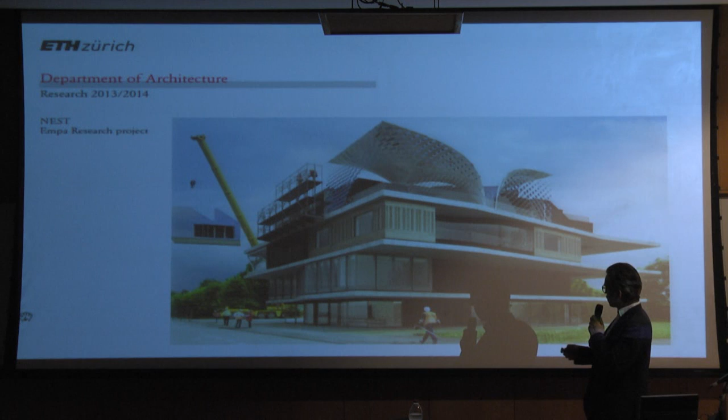This is the NEST building of the Empa Research Group, designed also by Gramazio and Kohler, equipped with different modules tested on site. So you see, we are not only about teaching and researching, but we like to translate and test it also in reality. And maybe to come closer to what we're doing tonight, it's also about exhibitions of student work and its development that we like to show.

We like to publish this work also. The ETH has a big output in publications.

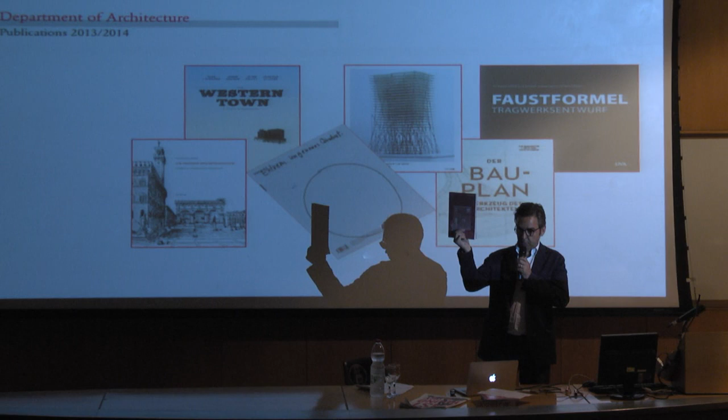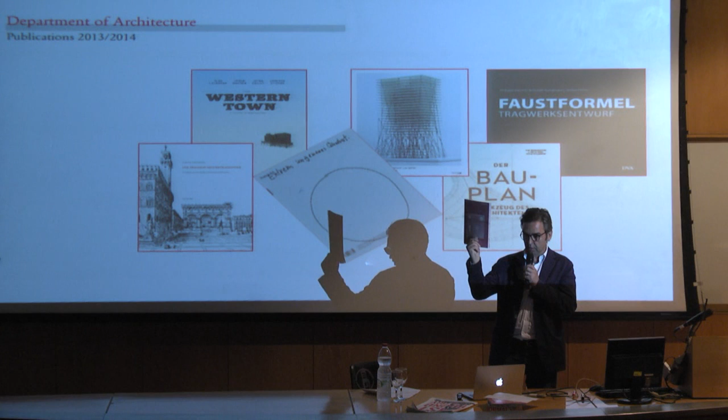Something interesting we want to share with you: periodically at our department, at our chair, we produce something called the Slum Lab magazine. My colleague Alfredo was here two years ago, almost to the day, and presented this magazine. I'm bringing you a new version for your library, and the outcome of this workshop is the plan. We have secured the necessary funding for it. The outcome of the workshop, with probably a continuation of two to three months longer, will result in a new issue of the magazine. So I think problem-oriented work and project work is always the best medicine to keep people together and keep going.

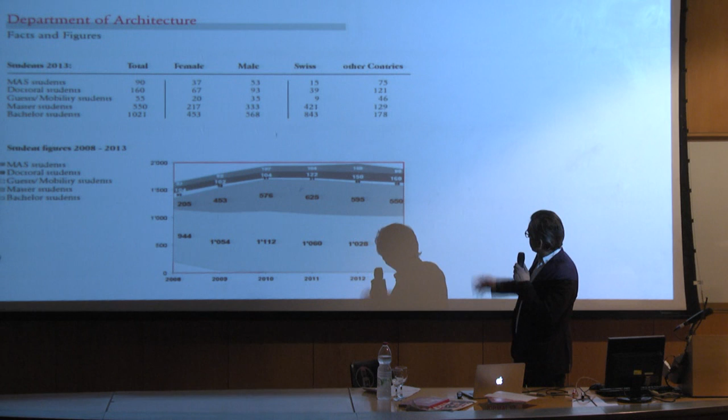Once again, I mentioned we are roughly 2,000 students. Here you have the numbers. We're flattening out on it, but I'll leave you with that and step into the lecture. I didn't want to miss the opportunity to introduce our department on a general level, to give you a good idea of whom you're dealing with.

We already heard this is a project of cooperation, and we think a lot of development opportunities are actually in active collaboration and cooperation. And cooperation is always also a change of perspectives, right?

You all know this picture, obviously. You see it almost every other month. But actually, secretly, this photograph celebrated its 40th birthday just a couple of months back, brought back by Apollo 17, which is the most famous photograph in history, I was told. It's the view of the Earth, the blue marble that came out of it. I'm showing you that because it's also about the creation of consciousness. Researching and teaching is also about building up a kind of consciousness in society and creating a theme, a topic for our society for the future.

And as we look closer, this blue marble over time has actually turned into something else. It's not the blue marble anymore, it's actually a network of cities. This is our societal challenge that in the last couple of decades concentrated much on the environment, on our natural resources. We are entering really a new era, one could say - it's an age of cities, an urban age.

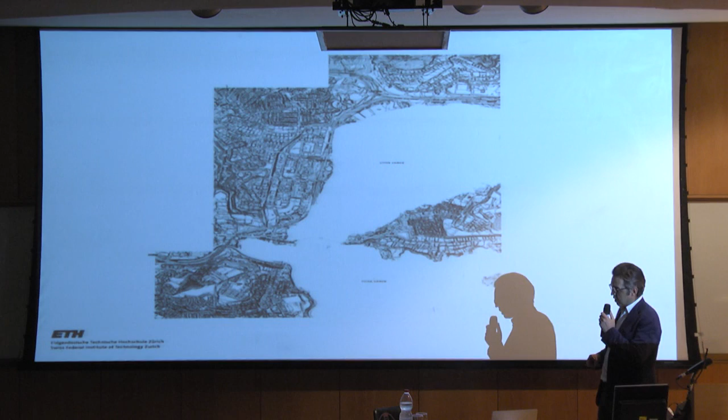I'll give you another example. If you look at a map of Caracas, Venezuela, this is in the east of Caracas. Only a few years back, this is not readable in this pixelation, but it actually says Zona Verde. Those areas were introduced in the mapping at City Hall as Zona Verde. Today we all know those areas look like that: a majority of the population lives in highly dense, choreographed, self-organized neighborhoods.

We have started, and this is my pretext before I lead you into two projects, one in Caracas in a tower and the other in South Africa in a township, to look at them with more detail. What we call this is not a mountain full of houses, but this is actually a house the size of a mountain, and this house has many, many floors.

You could dissect and figure out what is actually connected and what is separate from each other. But I think this whole idea that cities are not an assemblage of different houses -- if you look at the infrastructure, at the land, at the very pretext and basis, as we talked about at a student review this afternoon -- if we actually change our perspective again, we will come to a lot of new and different starting points.

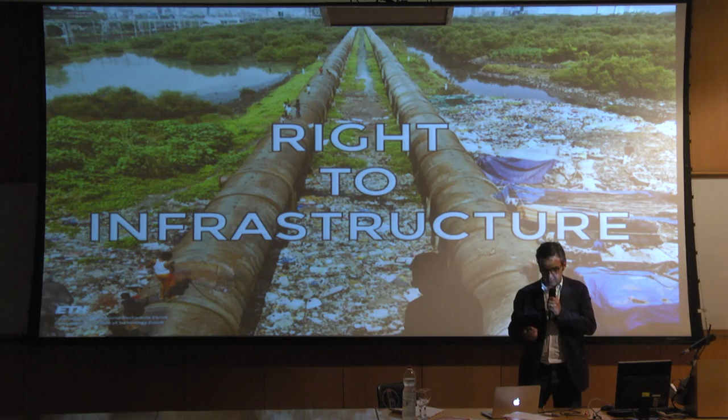By law, informal settlements in Mumbai are not allowed to be connected to the water system because the resource is too precious - probably something you'd have to deal with in an arid zone like Israel in the Middle East as well. I think those will be, and already are, the big challenges.

The right to housing - those rights are already laid down in texts, we all know them, the UN Habitat is disseminating them. The question is actually, how do we do this? That's still a big question mark.

It's very beautiful to claim that right, that people are allowed to live where they choose, that they're not sent by government to one place or another. Now actually the Chinese government is sending them into the cities whether they want it or not - before they were sent to the countryside. But the question is actually how to achieve that.

We think that democracy is certainly a very important tool in urban development. It's a very different ball game if you live in a dictatorship, a totalitarian regime, or a democracy. I think there are a lot of models that will only apply in a democratic society. It is also about transparency.

We were witnesses, with a group of ETH students going to Sao Paulo, when this favela was set on fire deliberately. At the time it was not known - somebody saw the gas cooker catch fire, but this fire was actually set by developers. They were brought to trial, and the fire only stopped because it started to rain. But we can't count on those accidental rescue angels anymore.

I think this is also why we called the exhibition over there 'From Denial to Anticipation.' We have to anticipate more of that.

That is also why I like to show you, as a last slide in this set, that the number one problem in cities is actually safety - not safety and security, I would say, just safety. It's not the water, it's not the electricity.

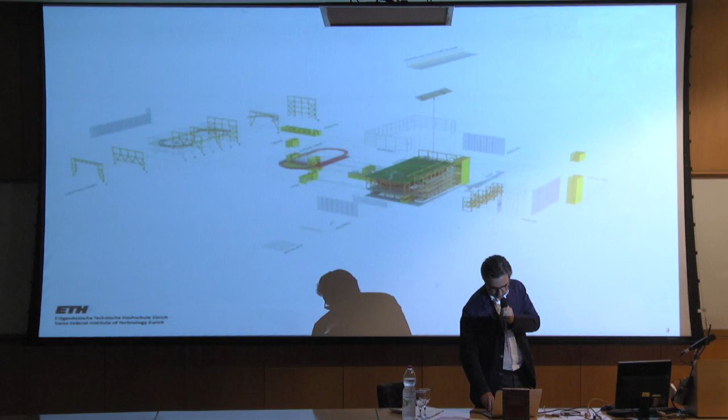This, for instance, is an industrial design type we call the vertical gym, and we're building them by the dozen. We identified 100 sites for them, offer them as a toolkit, and have built them to provide 15,000 people per month a space to practice sports, but also a covered internal space, something very much needed in slum areas.

We have also proposed that culture be seen and practiced in a more formalized framework, something that exists in all vernacular settlements but is often under-evaluated. We looked at a project today, in the afternoon, of a Berber village, again something where one has to find the essence of this culture and what that is.

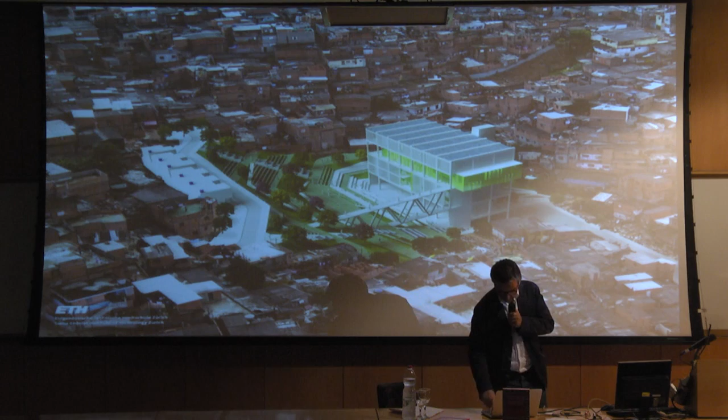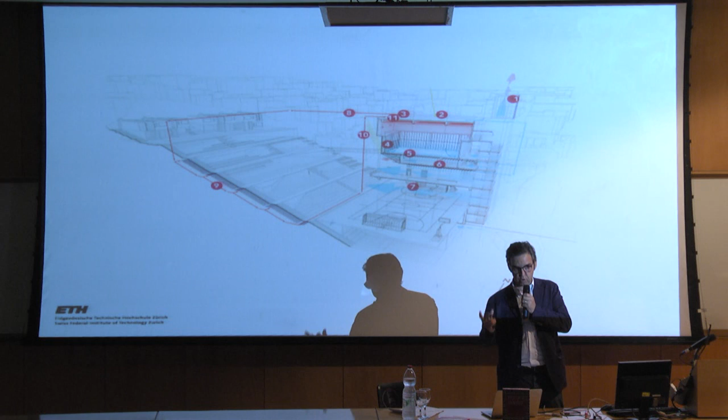In this case we suggest a music school on the site of a former landslide, using technology developed at ETH Zurich for capturing resources. In the same way as the Monte Rosa hut I showed you earlier, standing as a jewel in the glaciers, a building in a slum area is almost as dependent on taking care of its own resources—there's no water network, no electricity network, etc. to plug into in the slum area.

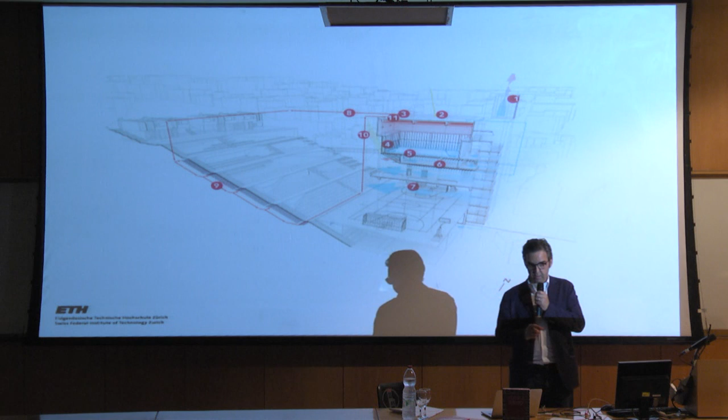I think this independence or semi-independence from centralized infrastructure is something that will be a lot more important in the future. And the last example before I step into the tower and Africa presentation is this metro cable system.

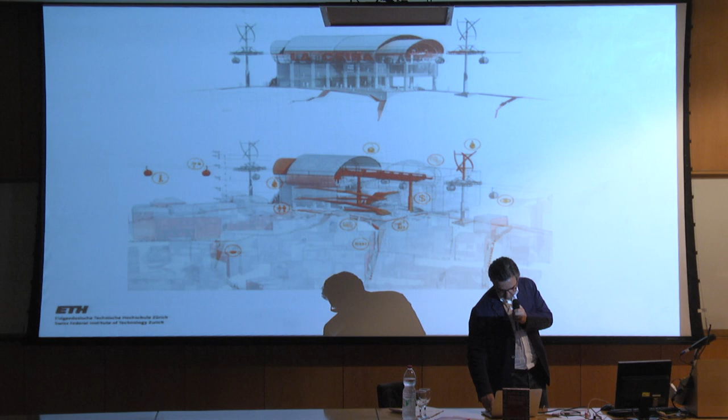Again, a technology that comes out of the Alps, out of Switzerland, that we have helped translate into other contexts—the industry practically opened a new field for them. What works in the Swiss Alps for the ski industry and for tourism, bringing this technology into another context and changing the perspective, has practically opened a new field of application for the industry, but it's also raising new questions and asks us to become more creative.

Because this question asked by the Harvard Design Magazine—can designers improve life in non-formal cities—is still a valid one. To what degree can we provide appropriate solutions, also against the resistance? I would say resistance often accompanies development; it's not that everything goes smoothly.

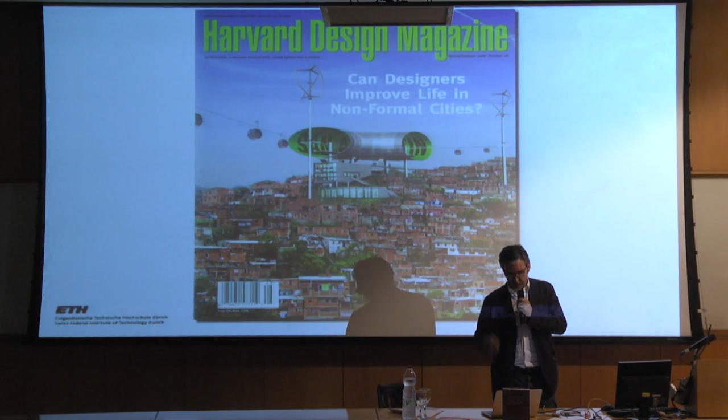This brings me now to the two examples that I promised you. One is this African adventure into South Africa, into a township of Cape Town, where we started identifying an area in the Khayelitsha township, behind the big Mesa rock in Cape Town, just off a few kilometers from the beach, where we began to cooperate and collaborate with a local NGO, Slum Dwellers International, run by Andy Bolnick.

They actually got a big grant from the Bill and Melinda Gates Foundation, also to develop in parallel a toilet module incorporated into this building I'm going to show you. It's a product, a co-product of EMPA in Switzerland, part of the ETH network—a sort of dry toilet, a closed circuit. And we're developing a sort of housing module.

What is this housing module about? I will not show you the whole movie, I'll jump over it, but I do want you to listen to the first sentences of this gentleman here.

I started to stay here, it was 1992. I was staying in a terrible shack. When it's raining—every winter season here in Cape Town there are heavy rains—we put some bricks on the floor because the water runs through, in and out, you see. And you have to put plastic on top of the roof because the roof is leaking.

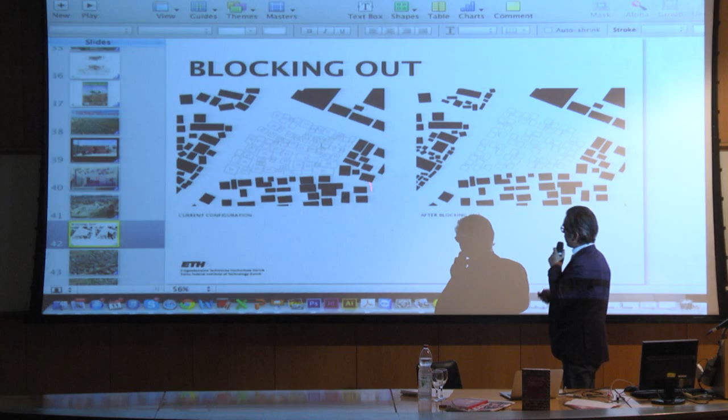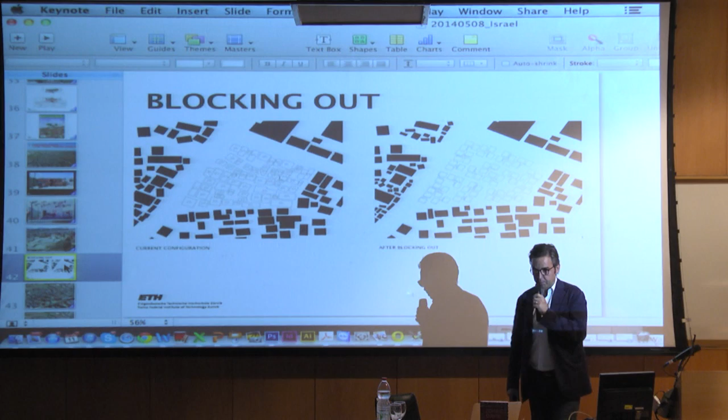So what were these ideas about? One of them, blocking out. Over time houses actually clustered like this, organic growth without anticipation, with a lot of density, because of course people don't have access, people don't have space, people don't have areas, although there is a lot of area—mathematically you figure out that the space between houses is actually sufficient.

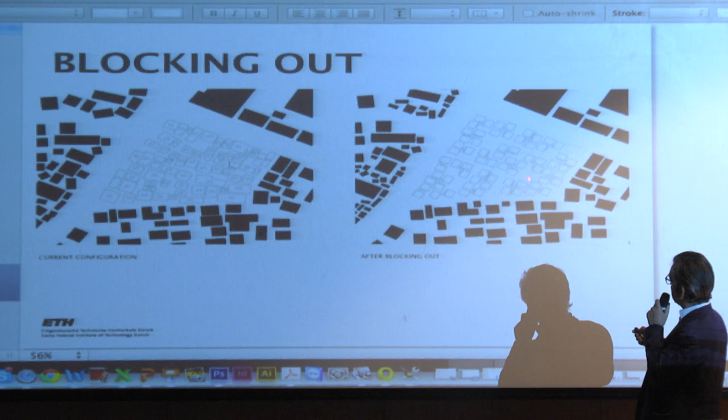We figured out that by reordering those houses, we could come up with an interesting plan that would provide sufficient space and territory. So if this is the original situation of Khayelitsha, we took this area as a zone of 60 houses and looked at it quite precisely.

We figured out that if we added a second floor, which is eventually happening anyway, and slightly reduced the size of the ground floor, people would not only have more space, but in the examples we identified, the few people who have two floors have either a shop, a garage, a kindergarten, or some other means of creating work and income on the first floor.

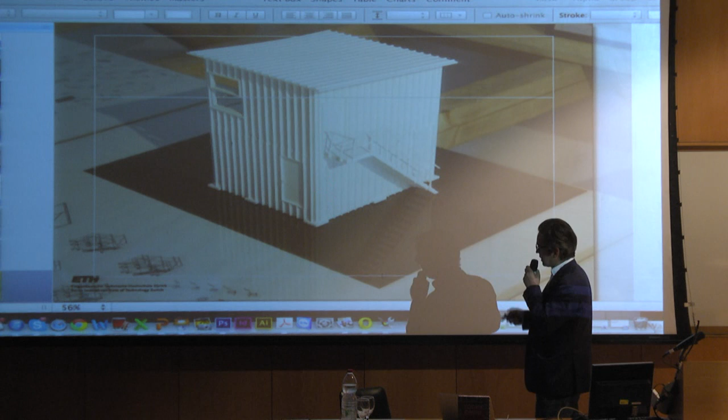So we thought that's a good idea—let's say speeding up this process of building two floors has become one of the main exercises.

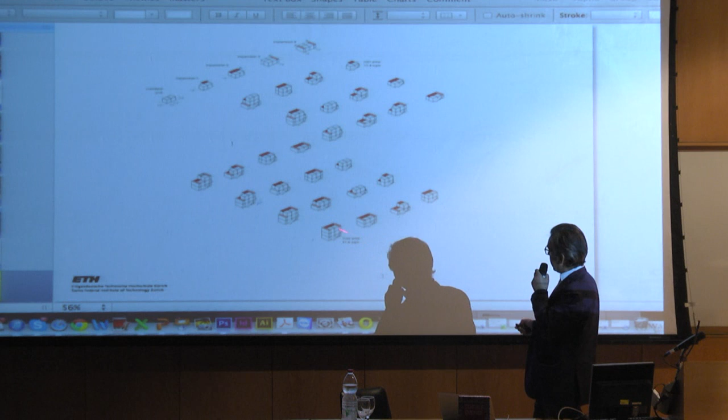So this is before, a one-floor settlement in the dirt, and we figured out—it was part of the exercise—to understand better how those houses look, how they work, how they're equipped, how many people live there right now, and to find and identify variations to that.

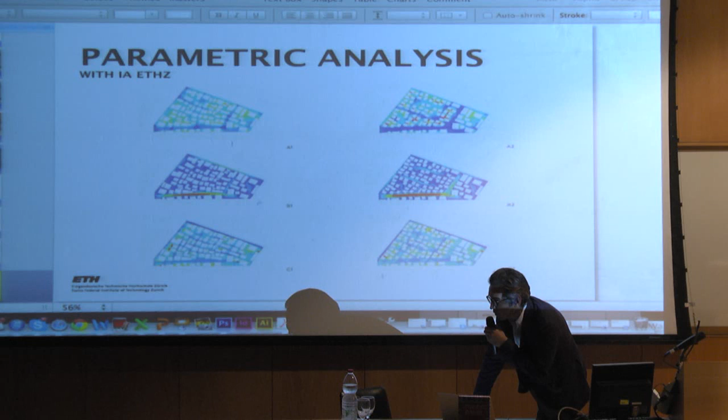And then we looked at this particular site and started making scenarios, also with the chair of Gerhard Schmitt. We had a couple of collaborators, because we also developed an app that allows the people—I told you earlier—

Pumezo moved out for 24 hours. He actually only put his furniture in front of the street while we built the house, and then put it back in again. This is actually below the radar of the authorities, I have to add that too.

It's slightly—you have to forgive me, Mr. Eichel—on the border of illegality, because we are becoming complicit in this sort of township policy.

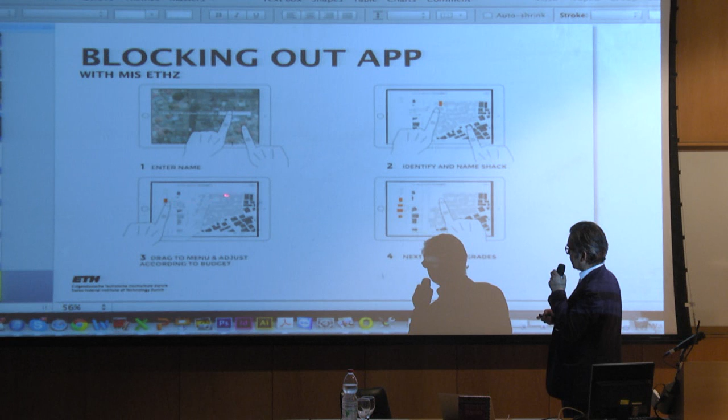But the point is that we figured out if we can bring in some technology like this app, we can tell people to enter their name, we identify the house—what is shown in red here—we take the house out of the neighborhood, we ask the people what future shape the house should have, what size it should have, whether a second floor, etc., and then we put it back in again.

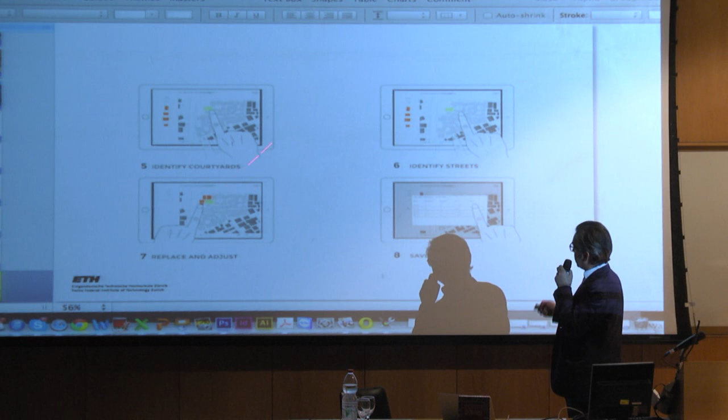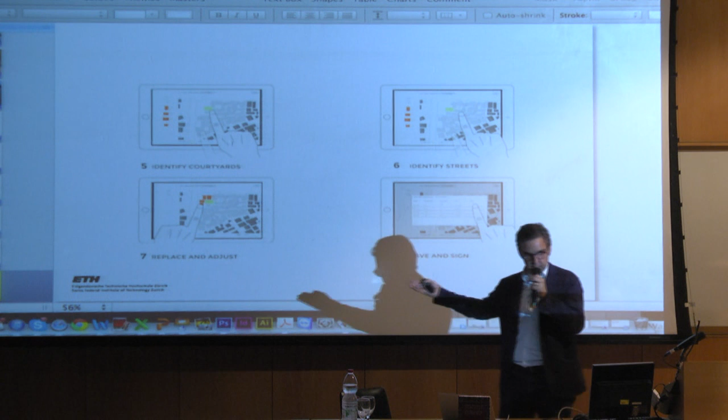So we can create a plan, a sort of contract that everybody can see, that everybody can participate in. We don't bring them to an office—we bring the office to the neighborhood. It happens right there where they stand, in the house or in front of the house, and the houses are built very fast and very quick.

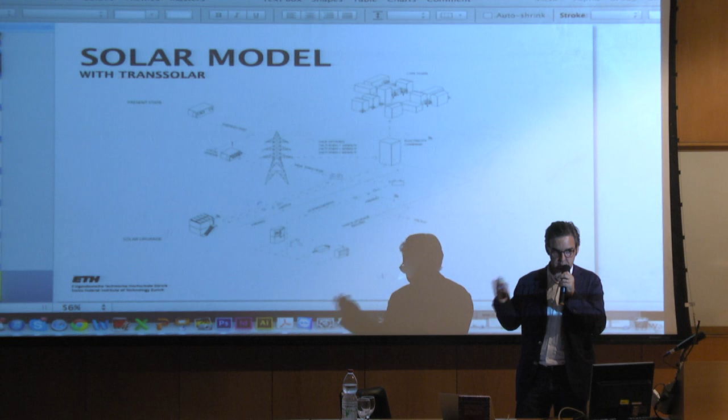We've made an exhibition in Zurich to raise funds to continue this project. We have 60 houses. We sold the exhibition down to 15, but we had a lady, whose name will stay undisclosed, who said whatever house you didn't sell, I will pitch in for that. One house costs $6,000.

I think we can now set up a sort of factory of house building. This all comes out of a workshop with students in Switzerland, which I think is important to point out. And it has led into a sort of method. The 3 examples I showed you earlier were sort of ad hoc developed on site.

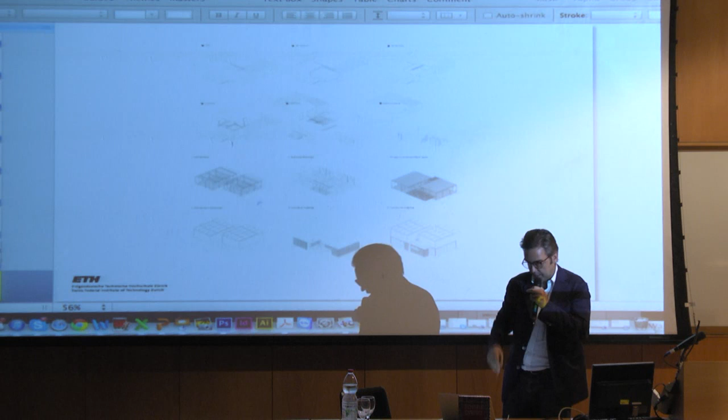But we think, and this is what this research and applied research is about, we have to develop more policy-oriented strategies. It's not that we can rely on people and bottom-up initiatives to solve the problems. The problem is that top-down and bottom-up doesn't meet, and I think we have to secure that these bottlenecks and gray zones get out of the system. That's one of the important tasks.

We also looked in South Africa on site at what materials are available, not materials that we can get in Switzerland but never in South Africa. Nevertheless, we found people in Switzerland who are interested to invent and produce materials fit for South Africa, like they'd be interested to develop materials for tropical regions. I think there's also a demand and an interesting outset there.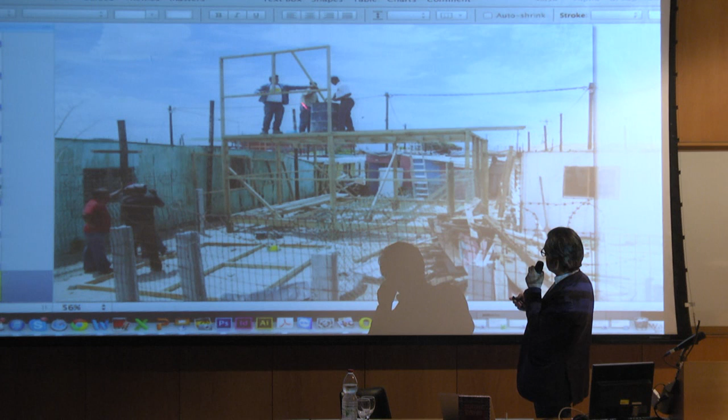This is one of our students, and the rest are mostly from the community. We went back down again just last December to build the house. We already had a prototype set up one-to-one in Switzerland, so we knew what we were doing — we didn't want to embarrass ourselves. So it was actually repeating a routine we trained to do, that we knew how to do, and we knew where to get the material.

This is Pumezo and his family in front of his old house, and this is Pumezo and his family in front of his new house. Yes, it is still a hot metal shack, it's true, but it has 5, 6, or 7 aspects which are superior to what he had before.

As we're building 60 houses, we hope that we'll learn better how to set the windows, where to put a sign, etc. And as we communicate this also in Switzerland, in a gallery — Ralph Eichler was at the opening, thanks again for coming — this is also the sort of support we need to make this project visible.

We showed that also in the context of post-apartheid, because there was actually a clear planning strategy for apartheid, and with the end of apartheid 20 years ago, that planning strategy didn't go away. The city has to work on overcoming this physical separation and the creation of barriers that the very DNA of this development was based on, and this is something we have identified.

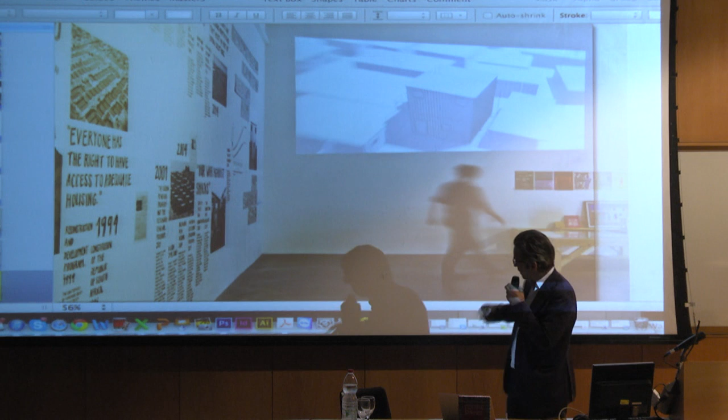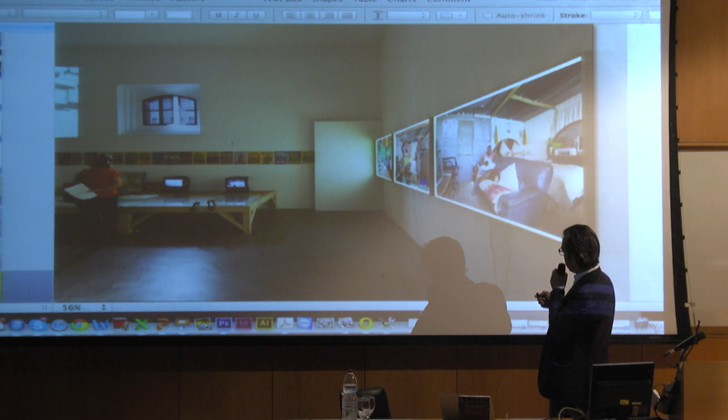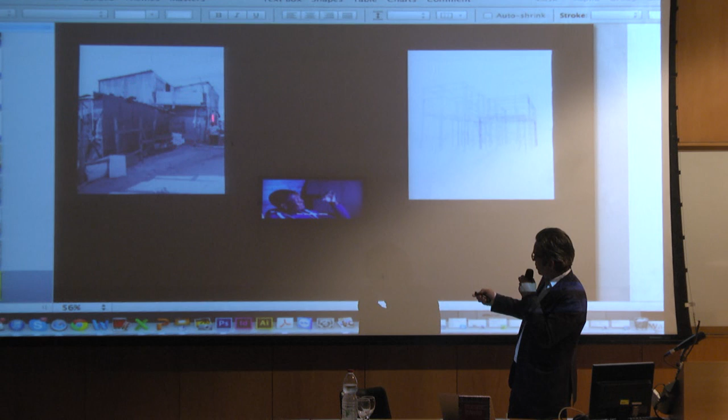We also know we have to communicate that project, and films — you saw the beginning of one — are one aspect of it. Here were the 3 prototypes that we found: one a kindergarten, one guy has a garage so he offers services with his car, and this is a young man who also founded a company on his second floor. These were all aspects of what we found interesting. That's one of the prototypes that existed already earlier.

So I'll leave you with a few more of those images, and I come to my second and last example about the Torre David that I want to share with you.

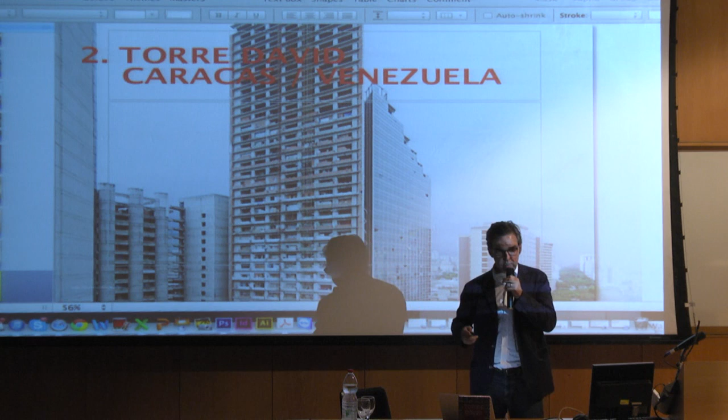This is a project, I would say, with less concrete participation in the realization of our proposals. Nevertheless, it was very interesting for us to research this tower, this giant of 45 floors, and to find also in Switzerland a partner who would accompany and finance that research.

That partner was actually the largest elevator producer, Schindler Elevators from Switzerland, who shared our curiosity about how a tower without an elevator can actually work. So I think we have quite illuminated people in those companies — they're not only interested in selling the elevator, but also in how it works.

This would be a movie, but I'll jump over it because I don't want to reopen the program again. So again, we're looking at prototypes that already exist.

This, one could say, is maybe one of the low-cost housing possibilities. That was actually after a landslide where refugees moved into a half-finished building structure. So whatever you like to say about it, it actually serves to a big degree the purpose. Because from the UN Habitat terminology, what a slum is, this is not a slum because, for instance, it has a stable roof structure and a sort of permanence.

You see, this is a structure. It's not finished, no running water, no electricity. Structure costs about 30% of an entire building. So one could say with 30% of the investment, I could actually solve already a big percentage of the demand. If we think about providing 100% solutions, we obviously can only offer that solution to a much smaller amount of people.

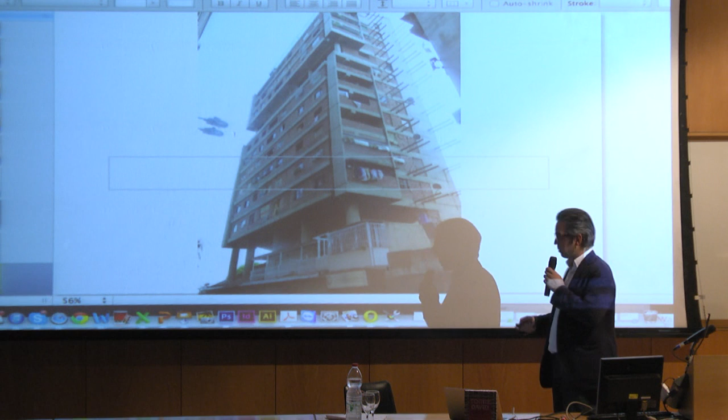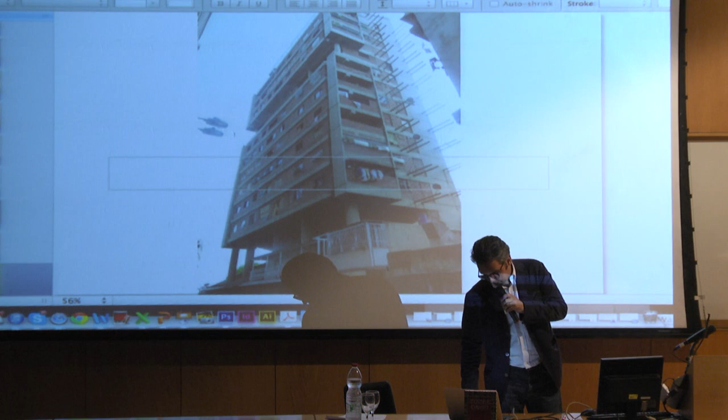So we went out and we looked for more such buildings. Another unfinished structure finished by people who, I would say, illegally squatted it, but again an example that exists by the hundreds all over our cities around the world, also in South Africa, probably also in Israel.

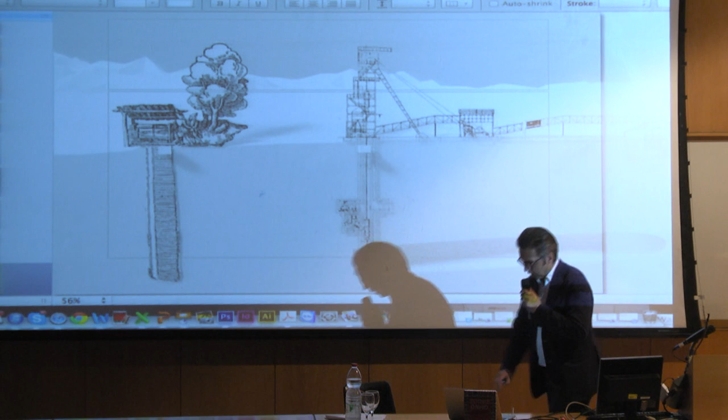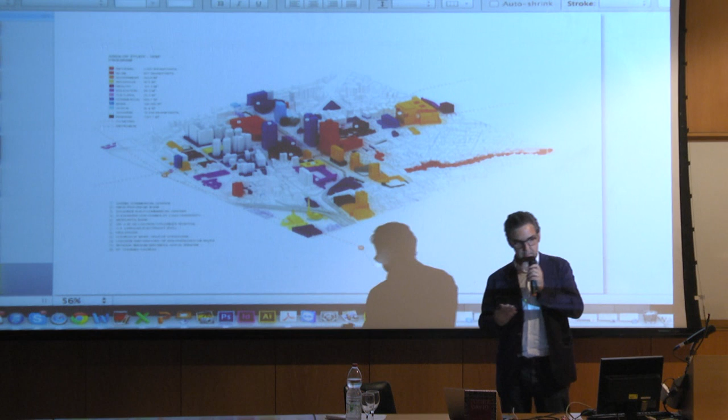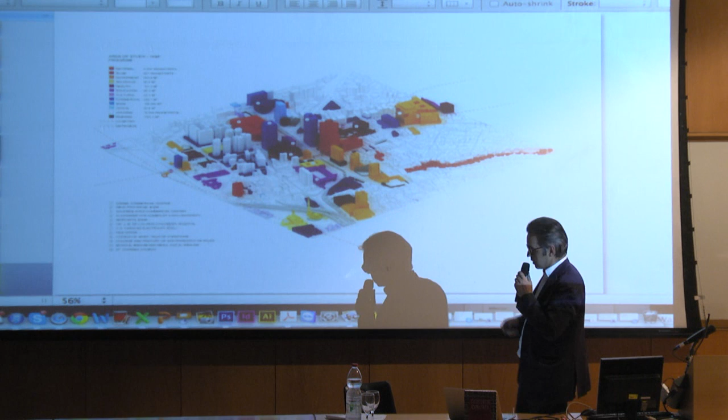Until we found this cluster, Torre David, not because it's also the tallest and largest, but because we also thought it's the biggest environment, the biggest laboratory to research that provides us in a 1 square kilometer area information of what else is necessary for sustaining such a building, because it's obviously not only the building, it's what is around it. It's about educational opportunities, workplaces, the possibility of plugging into resources again, and so forth.

We found out, for instance, and I show you this while I'm going through a few impressions of this tower, that the people in the tower are actually a 1,600 watt society. In Switzerland, we are a 6,000 watt society. Part of it renewables, part of it non-renewable energy based.

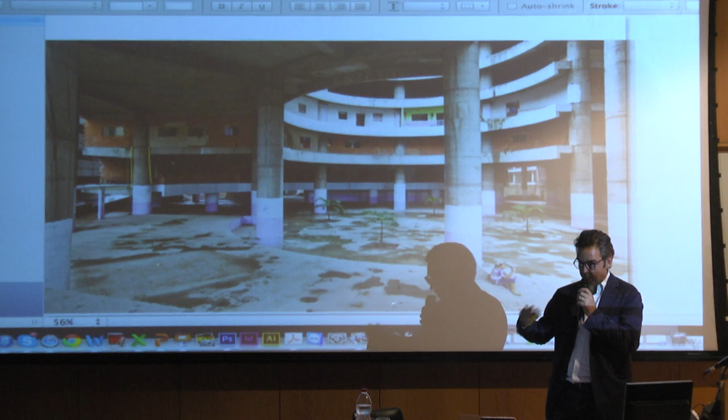But by researching, also with some of my colleagues from the Institute of Technology in Architecture, some South American PhD students, we researched the entire park of electrodomestics and equipment that people have in the tower. It's a squat, but it's surprisingly well equipped.

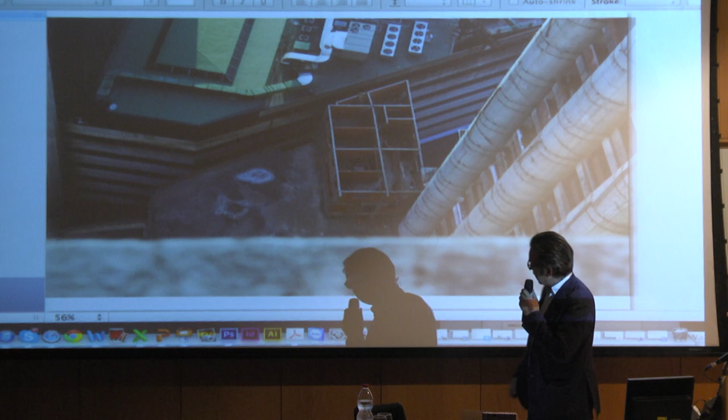It has also a wide range of programs, as you can see here from an evangelic church, a high degree of organization. This is the cleaning group that exists in the house that also gets incentives for doing that job. The building is also still on lower levels expanded in the old ways, as you could say.

And as we mapped and understood better how the building works, as we figured out how the apartments work and how the different family sizes and social units work, we figured out that there are houses inside houses, there's no facade, not only no elevator, but also no formal electricity, etc. There's no air conditioning. There's a lot of no's that you would assume a skyscraper should have. People use, for instance, tents within the floors to provide security for rain, but some of the areas are also quite elaborate and equipped.

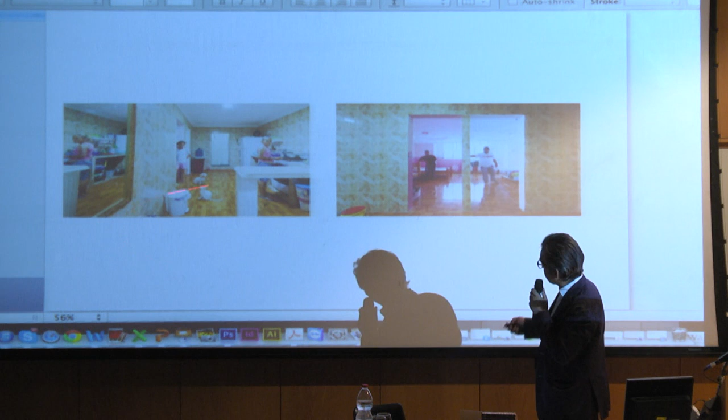But I go further to this more research base. We figured out how circulation works in the building. Very important, because circulation also underlies, mostly because of security patterns, a certain logic.

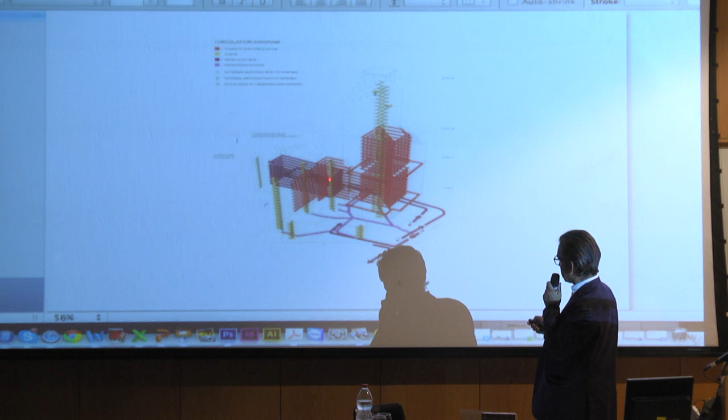For instance, one of the logics is that this would be the parking building. In a standard office building today, you would go from the 10th floor of this parking structure down in the ground floor, enter the lobby, go through security, and move up again. So you're actually passing 20 floors unnecessarily, thinking that you would park your car on this floor and you need to go to an office here. This also has an effect on energy, and this also has an effect on your time.

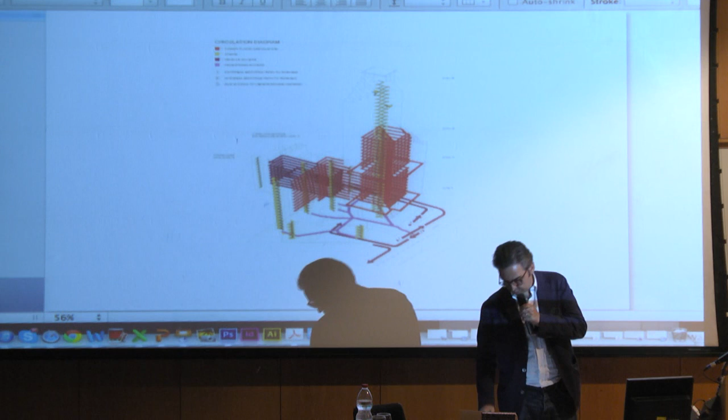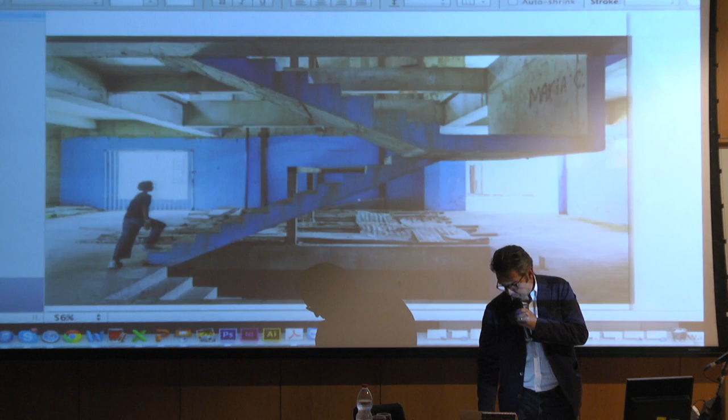So there's a couple of questions that is coming up. We looked also floor by floor, how those people organized themselves, how human beings have actually replaced infrastructure. You see, this guy is actually smiling. He can't walk the stairs, but he knows in a few minutes there will be a couple of people coming, picking him up and carrying him down to the street. So people, individuals, can actually, in a well-calibrated society, replace infrastructure.

That's also important for our Africa project, because as much as you could replace a lot of the necessary workforce or materials with prefabricated elements, one of the big challenges is actually to create work for this big number of people, meaningful and senseful work. So this is actually, instead of the elevator, people using this service with those motorbikes to drive up 10 floors in the parking structure.

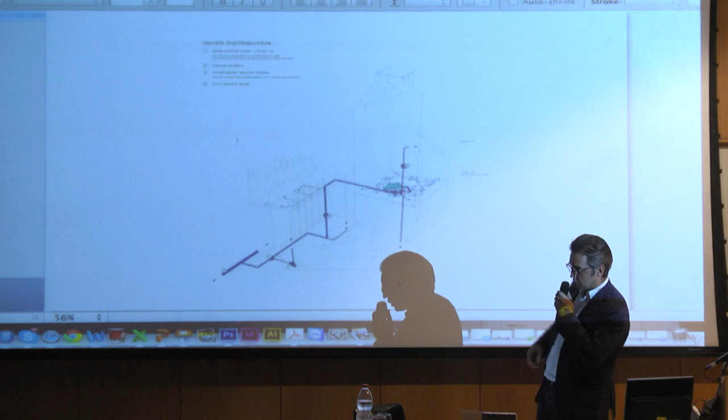And then they move through a hole you'll see in a later picture into the building. They also use gravity-driven water structures, pumping with very simple drum pumps water up the structure, and then distributing it through the building with gravity. So they bring it up a bit higher than necessary to distribute it later using gravity—low-tech solutions, but very interesting. They don't build up a lot of pressure, but they have a system.

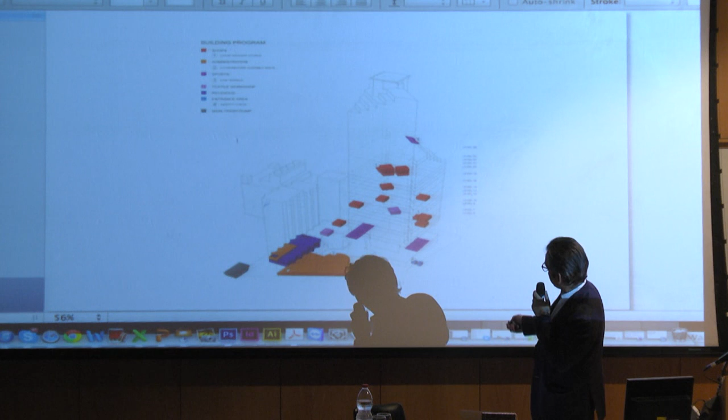We also figured out there's a lot of commerce in the tower that certainly wasn't planned, but that you find now—like the famous hole on the 10th floor that actually saves a lot of carrying power for the store next to it. This hole, beaten with a sledgehammer into a wall, has become sort of symbolic for the entire project.

With a few more images, going backwards here, you can see more of the inside of the store. As you climb higher, the prices rise too—quite a logical system—but the shop owners made a deal that the price only changes every 5th floor, because otherwise people would always walk one floor further down. It's actually a natural economy building up.

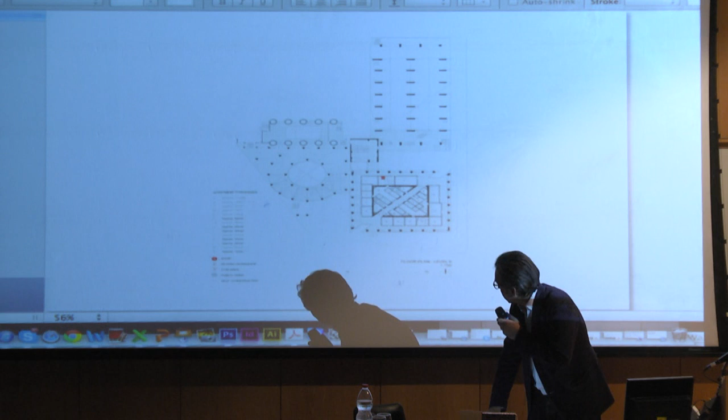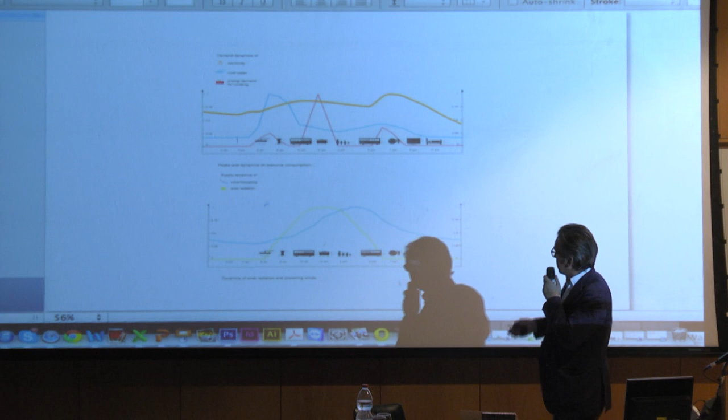We found this interesting because it practically reflects what's happening on the ground floor. As we kept mapping, we found sports in the lobby, a gym on the top floor—actually using elements from Schindler Elevator, whose pulleys they immediately recognized. We also figured out the energy peaks in the tower and what to do to bring those peaks down in relation to the neighborhood and the necessary transportation.

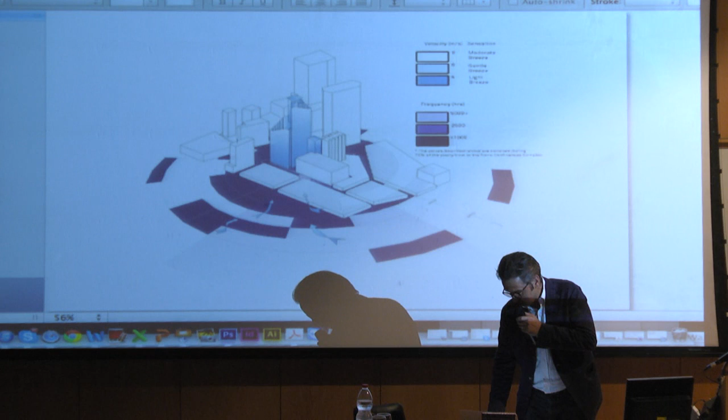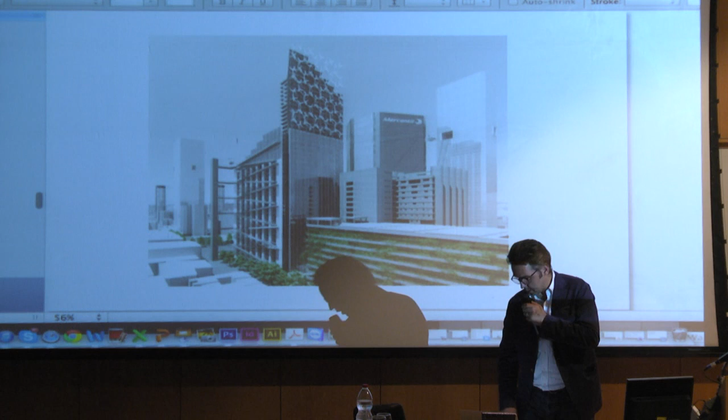I'll leave you with a few images translated into a possible future for the tower. We looked at the situation: the tower is currently occupied up to the 28th floor, and wind is blowing through the empty top floors. We invented a low-tech elevator system that docks only every 5th floor, where we started using ramps.

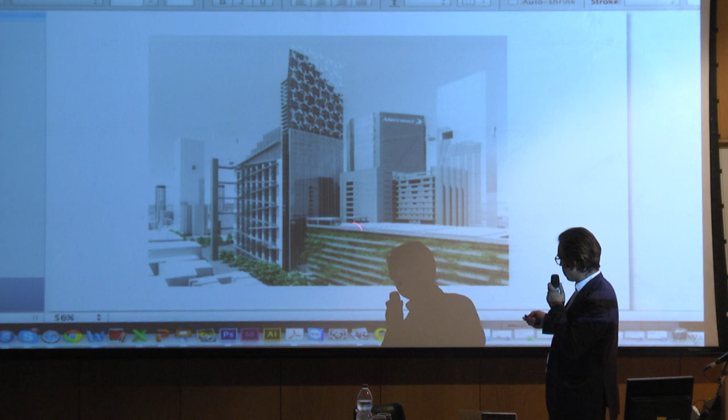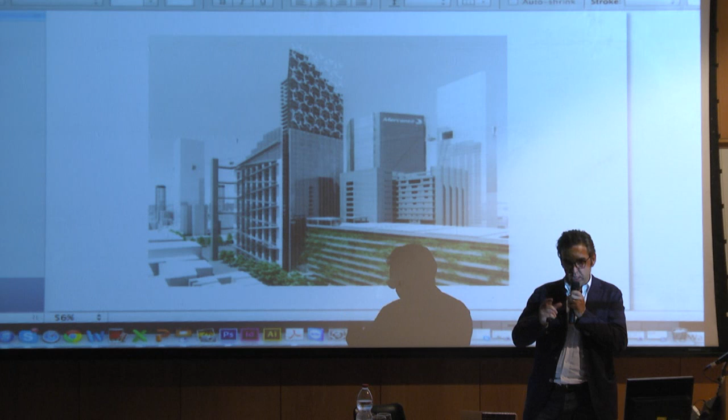We developed, with the World Food System, some urban agriculture that could be carried out in the parking structure and in areas close to the facade, to figure out the entry points—not to participate in illegal squatting, but to work on a non-centralized infrastructure urban model, and how to translate those solutions on a bigger scale. This is actually the hill where we realized the metro cable, translating that into the informal city.

We think the city of the future will actually be a sort of new city. As urbanists, we like to talk about pedestrian cities—cities that use less energy, produce less trash, and create marvelous views over the city. We find many of those qualities already in neighborhoods that are very undesirable to us. So the question isn't how to replace the population or the entire physical structure, but how to inject, with minimum investment but maximum intelligence, some game-changing moments to make those places more livable.

That was brought to the Venice Biennale, quite successfully, but we didn't forget about the people in Torre David. We actually brought them back the lion we won, because we wanted to escape the suspicion that it was pure gold—which it's not, just a heavy metal piece. It's standing now somewhere in the tower. I'm sure we'll never see it again. So thank you very much.